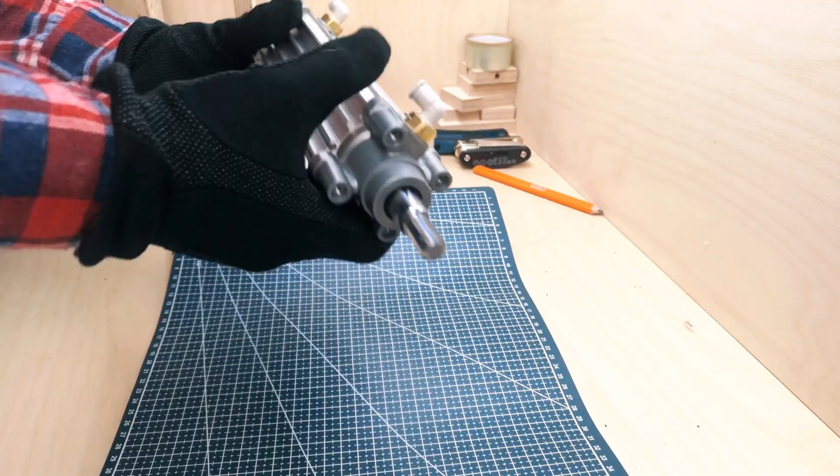Welcome back. Today we will talk about how to measure a pneumatic cylinder. It could be an easy task, but sometimes it's trickier than it seems.

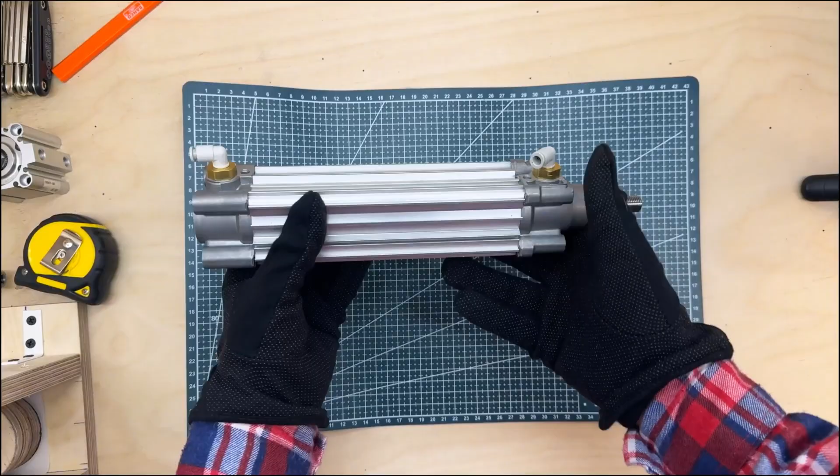Let's start. First of all, the cylinder has a few crucial sizes: its diameter, on which depends the power and pressure it can make, and also the stroke - this length of how far the cylinder can go.

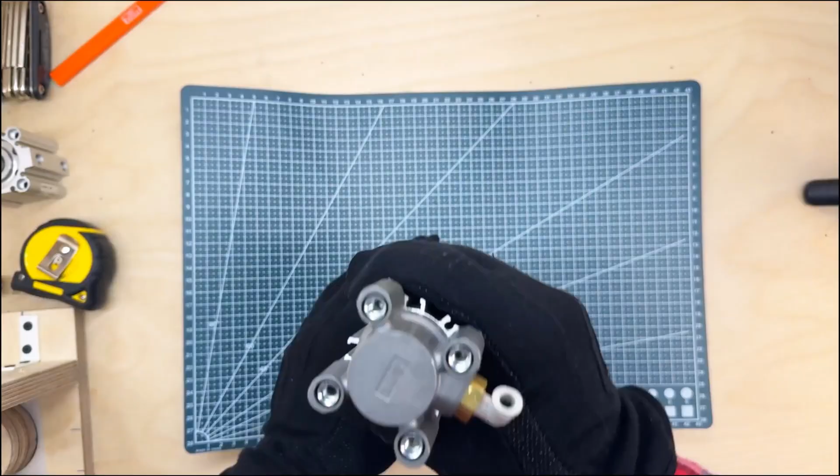But sometimes if you try to find a new cylinder for equipment or want to change the old one, you need to know all these sizes just to fit the cylinder perfectly back into the machinery. And what I like to do is make a drawing.

Let's measure this longest length of the cylinder. We can use a simple ruler, and here you can see 240 millimeters. Let's write it down, 240.

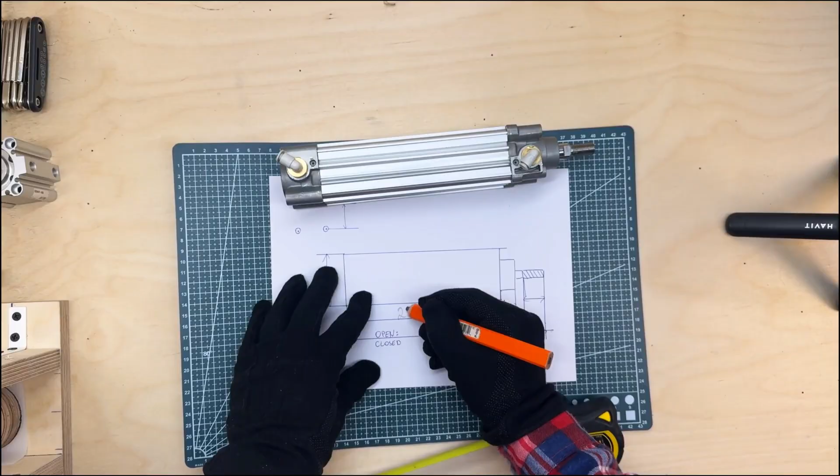Then let's measure this size of the cylinder. It's like a profile tube, something about 53 millimeters - 53, 54, but it seems 53.

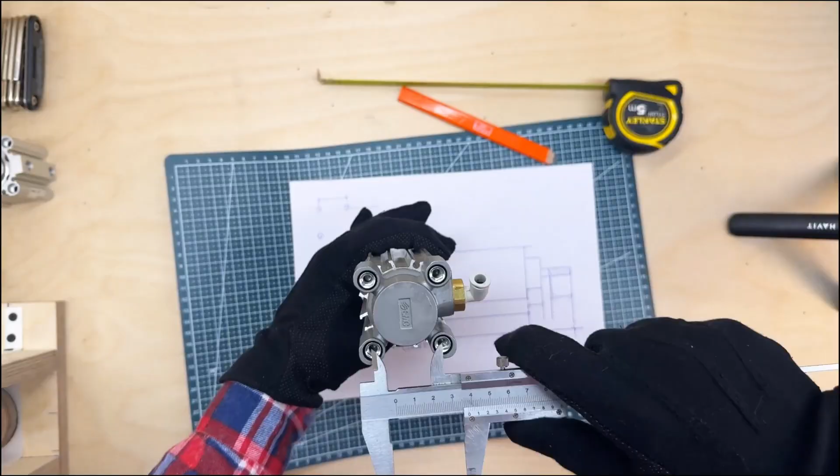Here we have something around 30, 38 millimeters, and here we have the same size, so it's a square. Let's write it down.

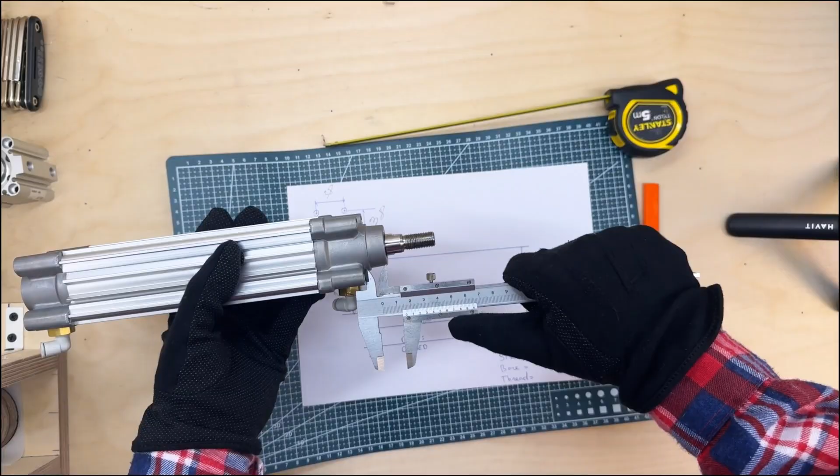Now let's measure this size. It's something around 11, 12 millimeters. I forgot this size also - it's this diameter, something around 31 millimeters.

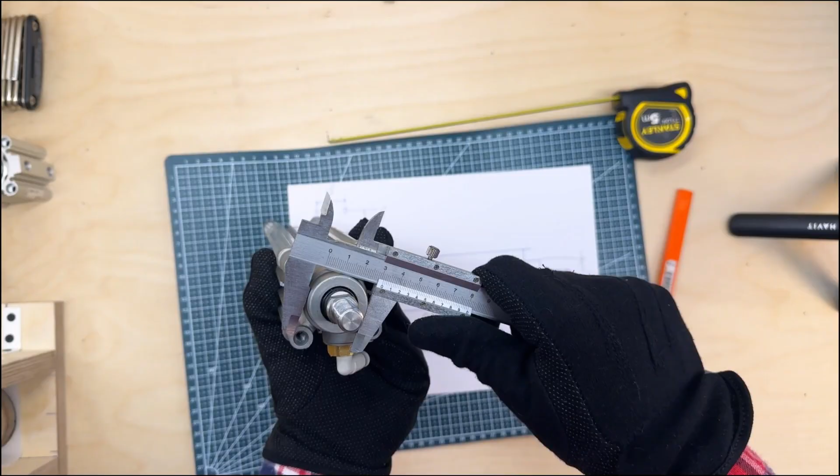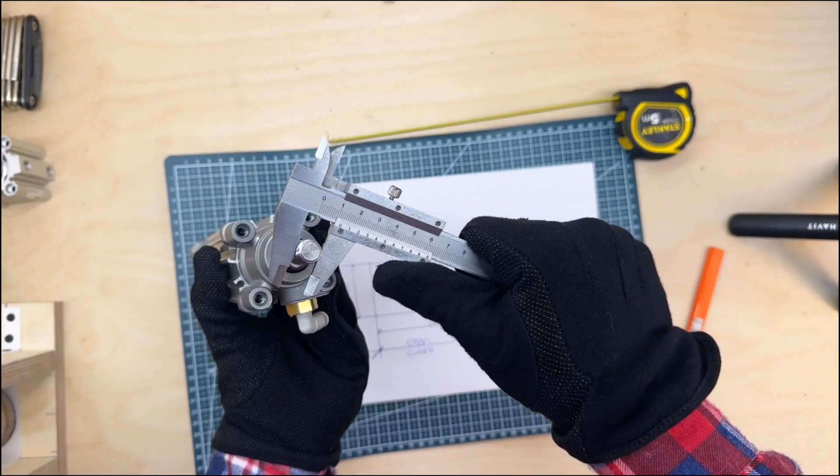And here's the tricky part. It's about thread. Usually cylinders have metric threads if we are in Europe, but fine metric thread is not like casual metric thread. It should be M12. And let's measure our rod - rod is 16, and the length of thread is 23.

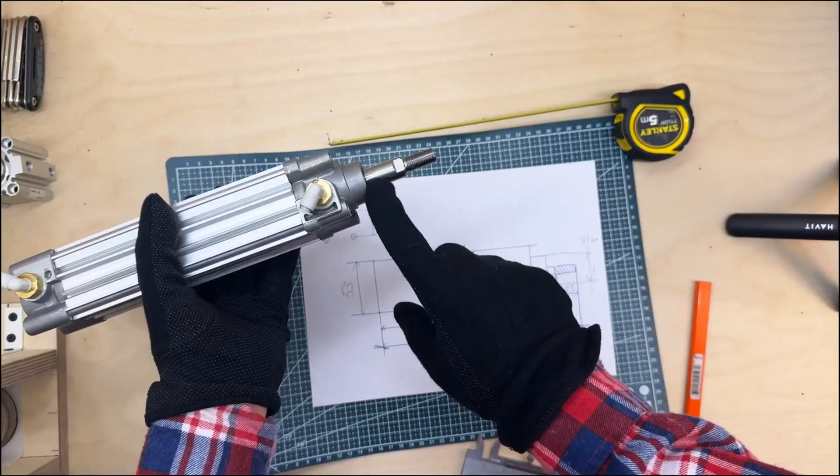And the most tricky part is the stroke. Why is it tricky? Because sometimes pistons have these extensions or modifications, so the stroke you see is not the real stroke. You need to measure this length.

Let's do it real fast. And it is 135 millimeters. At least it should be.

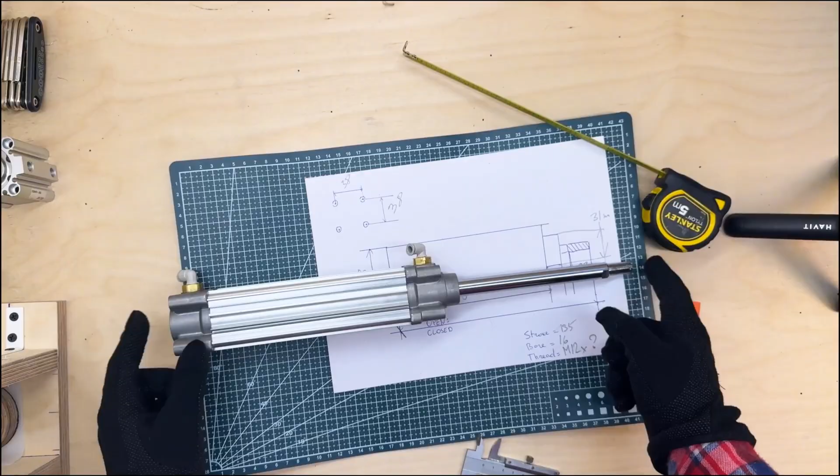But how can we double check it? We can measure our cylinder in closed position and in open position, and just compare the stroke between those positions, and the difference should be this 135. So let's measure it. Fully open, and fully closed - 295.

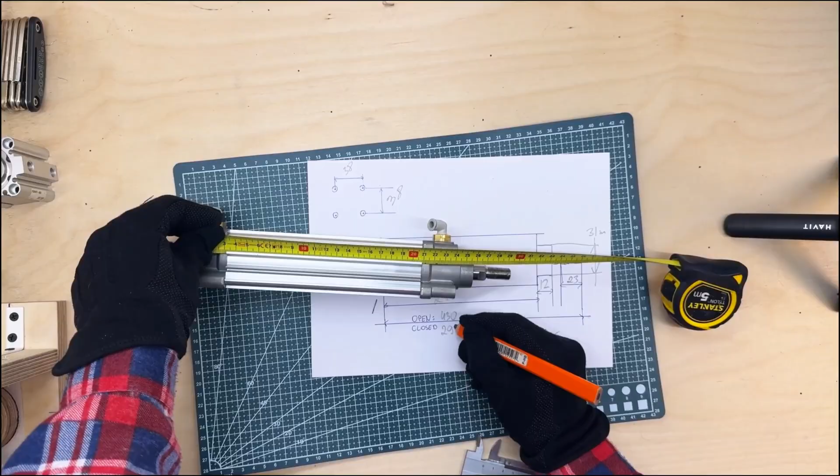295. And why check this? Because stroke measurement can be tricky - if you measure an old cylinder, sometimes there's dirt or something, and the cylinder doesn't make its whole stroke. But you always need to critically look at this stroke and this part of the cylinder.

They should be something around the same almost all the time. If, for example, you have such a long cylinder, but your stroke is only this much, it's a sign that something is wrong and the stroke is not full. Because if you order a shorter cylinder, this whole size will be shorter.

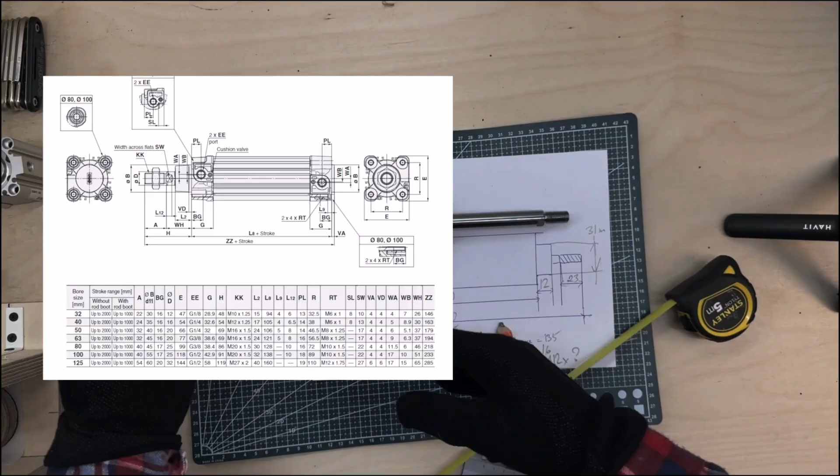So now let's go to our catalogs. Here are our sizes from the catalog. Let's start with the most useful size here - R or E - because if we know R or E, we can approximately understand what bore size the cylinder is. R is 38, and if we check our size, it's also 38, and it is a 40 diameter cylinder.

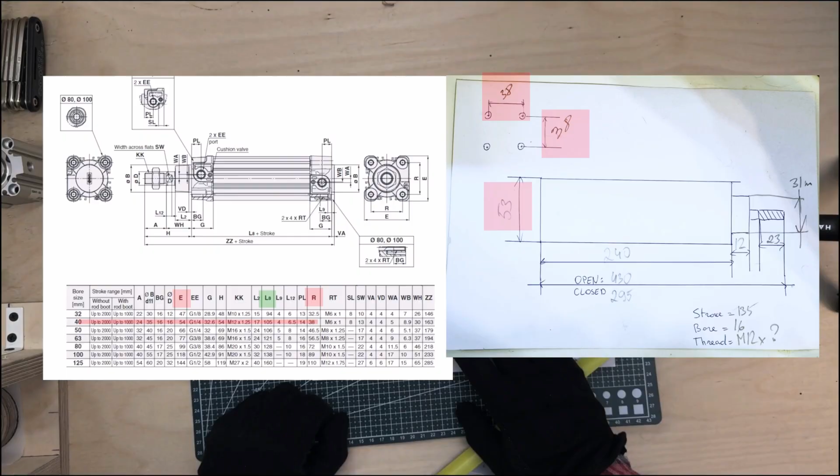Okay, then let's stick to that. The second size will be L8, but L8 is like L8 plus stroke. For example, if we know that L8 is 105 millimeters, we just add the stroke, which is 135, and we get 240. If we check our size, it's also 240.

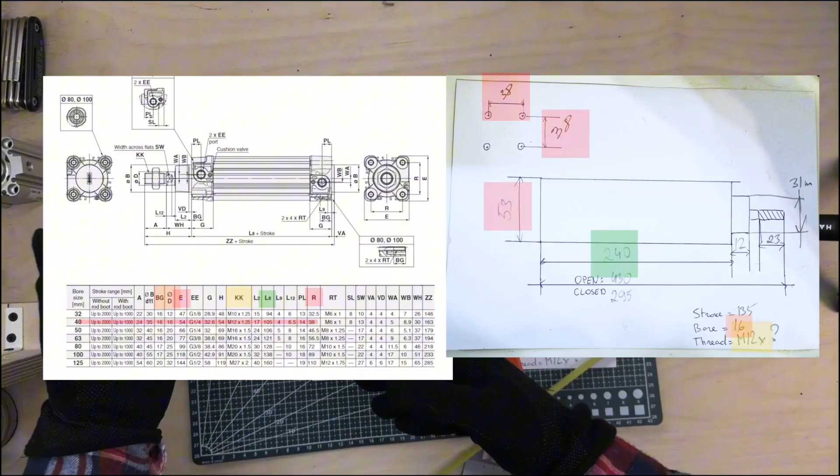Check the thread, it's size KK, and KK is M12 - ours is also M12, 1.25 is this small thread. Bore is our D - D is also 16. So theoretically, we now know that our cylinder is a standard ISO 15552 cylinder, and almost any manufacturer has those.

So almost any manufacturer's cylinder can be put in this place. Okay, and this is how you measure your pneumatic cylinder.